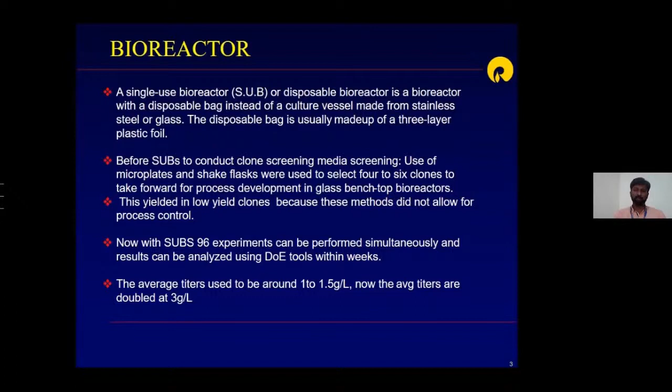Coming to types of bioreactors. As you all know, SS stirred tank bioreactors have wide application in suspension cell culture as well as adherent cell culture, with scale ranging from 20 liter to 20 KL. We can use them for suspension cell culture as well as adherent by using microcarriers. Beads can be added into the stirred tank, and we can use it for adherent cell culture processes.

Next, stirred tank single-use bioreactors. These almost mimic the SS bioreactors. These are three-layered plastic bags ranging from 50 liter to 2 KL for suspension cell culture, and they have different shapes and sizes, like cylindrical and cubical. Cylindrical usually consumes a lot of space in terms of height, whereas with cubical you can reduce the height. The H by D ratio will be 1:1 for cubical shape bioreactors.

Next is wave-induced single-use bioreactors. They are usually 2D and 3D bags. These are usually used for seed development activities and range from 1 liter to 200 liter scale.

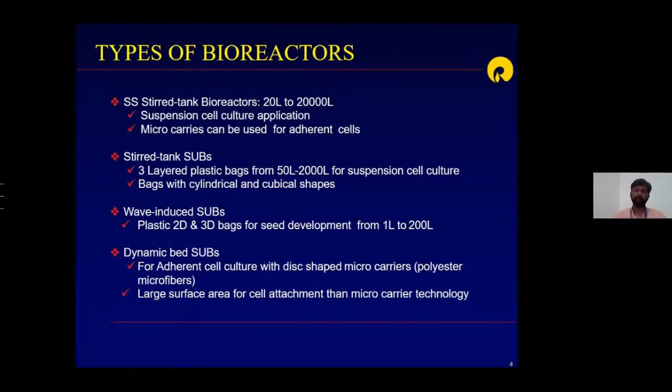Fixed bed reactors will offer much more surface area compared to microcarrier technology. Moving to the next slides. These are some of the single-use bioreactors available in the market for suspension cell culture. First, we have Pall. Allegro XRS 25 bags are available.

This is a unique technology, a biaxial agitation system, which shortens the mixing duration from 50 to 90 seconds in case of a conventional system; it will reduce it to 16 seconds, and these range from 2 liter to 25 liter scale. And again, in Pall we have Allegro STR bioreactors, which range from 50 liter to 2 KL.

In Merck, we have Mobius series bioreactors, which are usually disposable vessels starting from 3 liter to 2 KL. Again, in Eppendorf, we have BioBLU, which is 380 mL to 50 liter scale. These are also plastic vessels. In Cytiva, we have Wave 25, which is used for seed generation activity, which is up to 25 liter scale, available in the market.

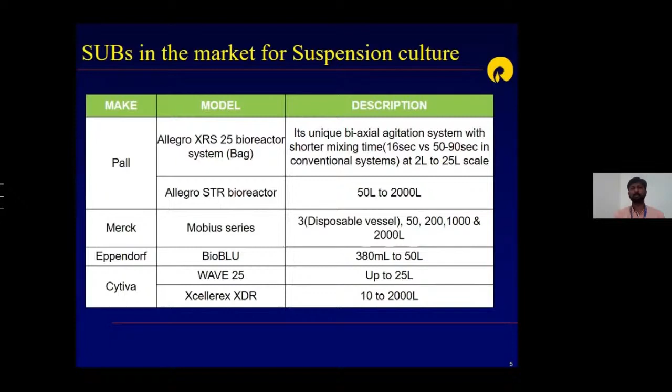Again, in Cytiva, for higher scale, we have XDR series ranging from 10 liter to 2 KL. So these are some of the suspension cell culture single-use bioreactors available in the market.

Coming to furthermore, in Sartorius, we have Ambr series single-use bioreactors. Ambr 15 and Ambr 250 series are available. These are widely used in the application of clone screening and initial media screening applications. We can run multiple batches in parallel using these Ambr series bioreactors.

Sartorius also offers Biostat bags ranging from 50 liter to 2 kL, and also Sartorius offers Biostat RM. These are the bag type wave bioreactors for seed culture application from 2 liter to 200 liter.

Again, we have a Biostat RM TX system, which is a unique fed batch and perfusion system for bags. And lastly, we have Univessel SU, which is again single-use tanks made of plastic, which range from 0.6 liter to 2 liters.

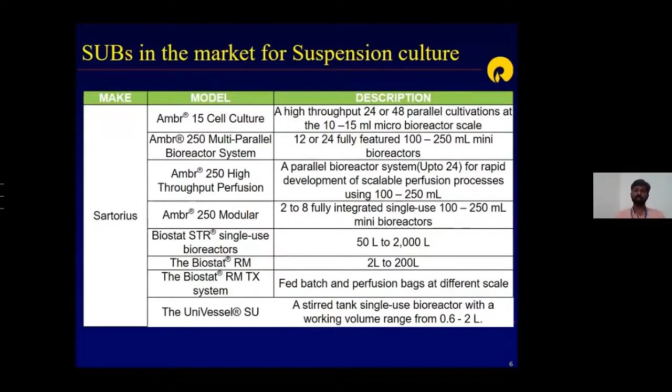In Thermo, we have HyPerforma Rocker bioreactors. Again, these are the bags for seed development activity. Up to 50 liter working volume are available in the market. In mid-range for pilot scale, we have HyPerforma single-use bioreactors from 50 to 2 kL.

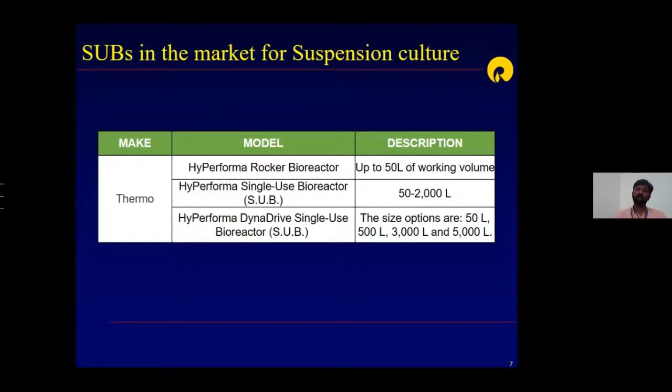Thermo also offers HyPerforma DynaDrive single-use bioreactors, which is quite different. From 50 liters to 5 kL bags are available. So next, these are some of the single-use bioreactors available for adherent cell culture process.

From Pall, iCELLis single-use fixed bed reactor nano is available, which offers up to 4 meter square area. In mid-level for pilot scale, we have iCELLis 500 plus system. This offers up to 500 meter square area. In large scale, a GMP model is also available in Pall. There is the Xpansion multi-plate bioreactor system, which offers up to 122.4 meter square area, which is a huge area.

Next segment is OmniBRx, which offers 0.5 liter to 200 liter vessels, in which we can get 1 meter square to 1,500 meter square area for adherent cell culture activity. So these are some of the bioreactors available for suspension as well as adherent. Some of the reactors I might have missed.

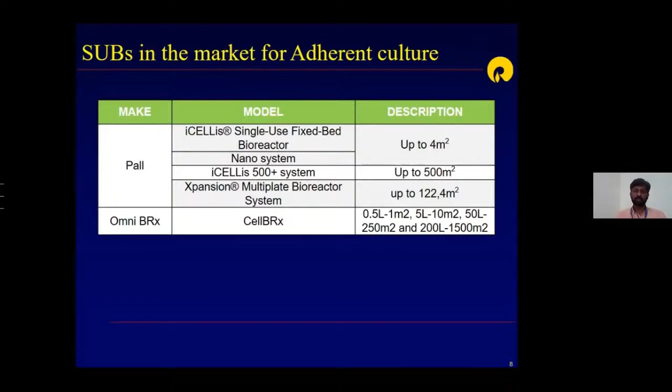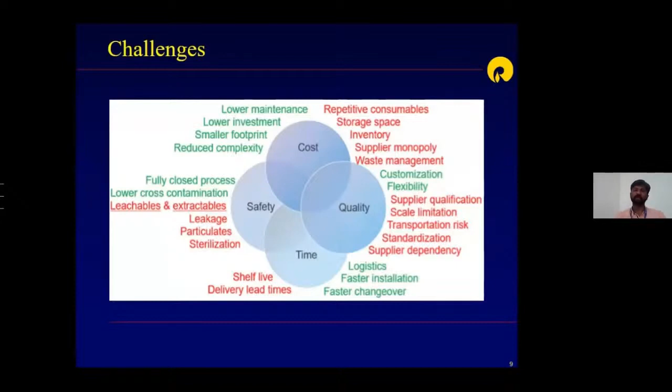Coming to challenges related to single-use bioreactors as well as conventional bioreactors, which involve cost, safety, time, quality. These aspects are the challenges which we face in single-use bioreactors as well as conventional bioreactor systems. So, advantages of single-use bioreactors over SS bioreactors.

Single-use bioreactors eliminate the cleaning validation process, as the cleaning is minimal. We can reduce activities like selection of disinfectants and CIP chemicals, preparation of protocols, approvals, execution of multiple cycles of CIP and the disinfection process. This is a huge task which consumes a lot of manpower as well as consumables as well as utilities.

We need to send the samples for CIP, and post CIP we need to send the samples and wait for the results. These can be avoided in single-use bioreactors, where there is very minimal cleaning activity required. Next one is the shortened downtime and turnaround time.

SUBs offer minimal downtime during post-harvest activities, which is usually a decontamination activity. And turnaround time is the preparation activity for the next batch, which involves CIP, pressure test, SIP, full vessel SIP, and thermocouple installation. All these activities, which require a lot of time, manpower, utilities and cost, can be minimized.

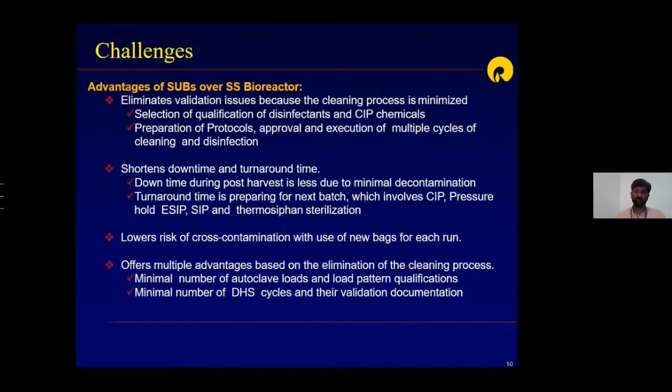Again, when it comes to capital cost and operating cost, more than 25% savings on startup capital can be achieved using single-use bioreactors. And when it comes to utility and space, the cost goes down up to 50%, and manpower cost is reduced considerably. And also the installation is very handy and very easy.

As we are eliminating the SIP and CIP process, it also eliminates the design of boilers, water purification systems, and steam lines. All these design activities can also be minimized. It also reduces the carbon footprint by 70%.

You can see the example here. Xpansion 200 bioreactor, which is hardly 80 centimeter height, which is equivalent to 20 multi-tray vessels. This is a huge amount of plastics which can be saved. That in turn reduces the carbon footprint.

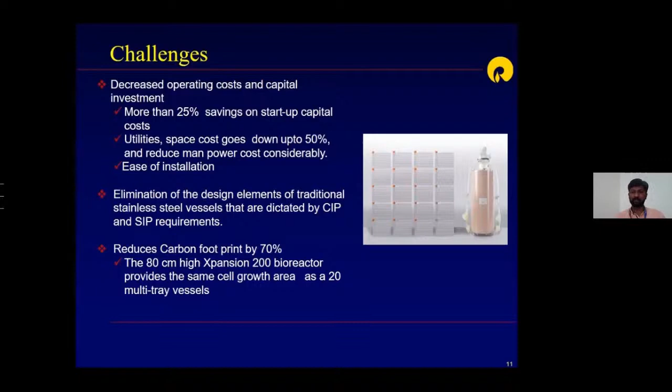Now we are coming to another segment, challenges with the single-use bioreactors. In single-use bioreactors, scalability is an issue. Mass transfer is a challenge at higher scales. This topic will be handled by Mr. Pankaj.

Then, larger scale bioreactor handling is a challenge because of the area it occupies and handling without puncture and all those things. During the installation, air needs to be passed inside the bioreactors to inflate it, and you need to check the integrity, all the ports, all these things we need to check. So this is a little hectic, and it consumes a lot of time and manpower.

Single-use bioreactors are expensive. Now, due to the pandemic situation, the supply chain is in a bad situation. The prices are almost double.

Performance is not completely proven. This doesn't mean that single-use bioreactors don't perform well. When compared to conventional SS bioreactors, single-use bioreactors are a new technology, though introduced 25 years back. So we have limited data on single-use bioreactors compared to conventional bioreactors, which have been there for decades.

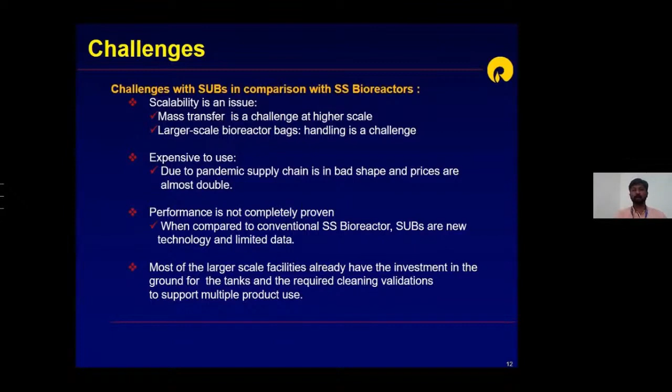One more challenge with single-use bioreactors is leachables and extractables. Manufacturers use stabilizers like tris phosphite for stabilizing the three-layered bioreactors. Under stress conditions like high temperature and irradiation, it leads to the chemical conversion of tris phosphite into bis phosphate, which is found to be detrimental for cell growth.

Again, single-use bioreactors are prone to puncture. When you go for a higher scale, 1 kL to 2 kL, as you scale it up to 5 kL, handling these bioreactors and installation without puncture is a difficult task. And these are difficult to move when they are filled with media or culture, so they need some extra tank support to move from one place to another.

Again, these are sensitive to temperature and pressure. The temperature range given for most of the bioreactors is 40 degrees Celsius. If you consider the worst case scenario, and the temperature is high during transportation and all, this leads to chemical changes and formation of bis phosphate kind of things. And disposal cost is also high in single-use bioreactors, as their size is large.

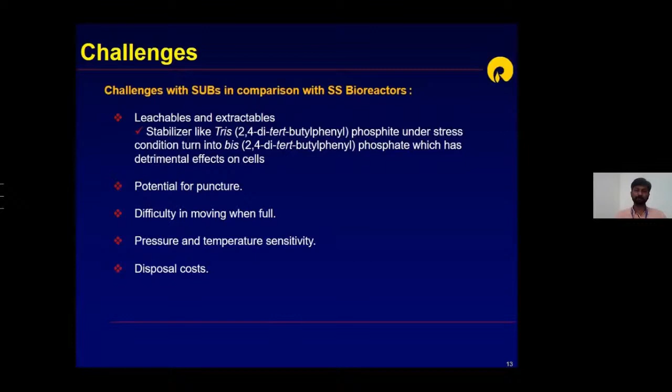The next segment is an example with time and utility. This is the mimic of a 2 kL bioreactor run at the production scale. This is the exact duration we have captured in the slide. It involves revival, pre-seed 1, pre-seed 2, seed 1, seed 2, and seed bioreactor, followed by production fermentation at 2 kL. The first 3 stages involve 48 to 72 hours, which is common in conventional as well as single-use bioreactors.

With single-use bioreactors at seed 1 and seed 2 level, we can reduce the time by almost 12 to 16 hours for each run. So every month you can run maybe 2 batches, because I'm considering here a 300 hours batch. In comparison, conventional bioreactors need almost another 2.5 days. So annually, almost 1 month will be wasted in this process.

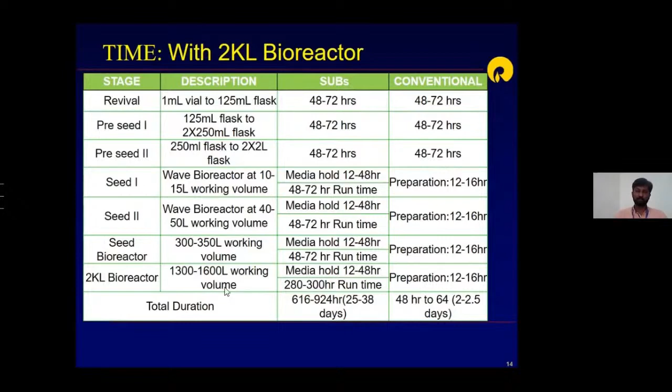The next segment is utility. As you can see, the process remains the same. For single-use bioreactors, we have some common gas requirements. In the conventional process, we require chiller, steam, chill water, PW, WFI, alkali and acid. Generators for these are also required, and the lines to carry the steam, chill water and WFI. These are all required in the conventional process, and can be minimized in single-use bioreactors.

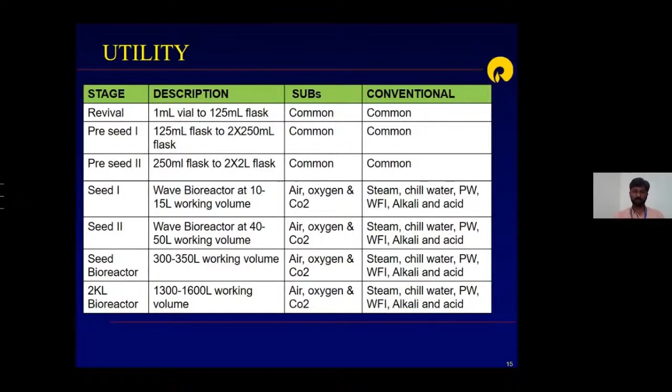A hybrid mechanism can also be adopted, wherein if you already have an SS conventional bioreactor system, you can use it for production scale, and for seed generation you can use these single-use bioreactors. Also, single-use bioreactors can be recycled, and they will reduce the carbon footprint by 70%. So that's it.

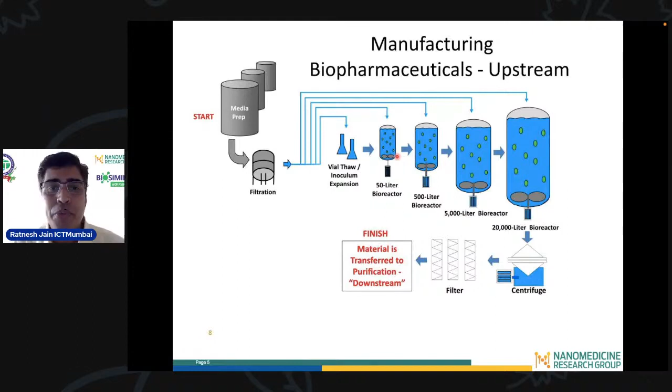Digital twins may be an alien name to some of you, but this has been operational for a very, very long time. Astronauts and those working in the airline industry use simulators before they learn how to become a pilot or an astronaut. You have to go into a simulator. So this is a very simple concept which has been in the industry for a very long time. However, these concepts are very new to bioprocesses. Again, the primary limitation is complexity.

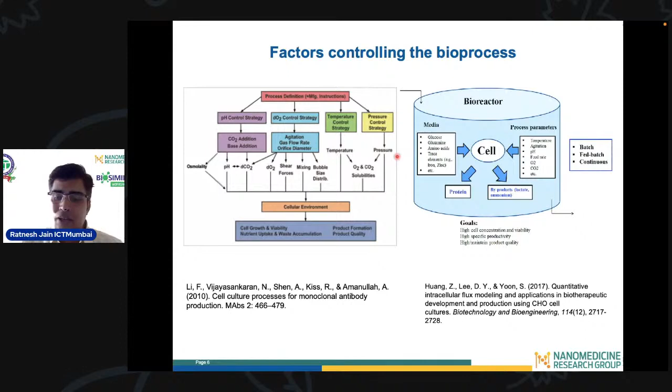And the bioreactor is also going to run in batch, fed batch, and continuous operation. It means there are so many parameters which need to be understood while running a bioreactor, and that becomes one of the major challenges for developing computational models. So digital twins come with a lot of hope to make these systems.

As I told you previously, these are virtual constructs of a physical system that mirror the behavior and dynamics of the physical system. A complete digital twin must have a physical component. It means you need an actual bioreactor and a virtual bioreactor, with automated data communication. A virtual bioreactor you can simply create in a computer, correlated with your running bioreactor, and you can get the data transfer.

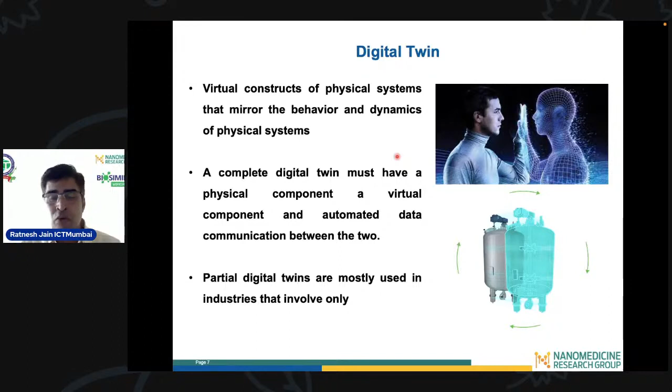Partial digital twins are also being used, where you collect the data, feed the data into a computer and try to create one. This has been happening for multiple years, but a real-time digital twin is still not a reality, which is a good motivation for companies developing bioreactors to go forward in this direction. Now, what are the existing computational approaches to give you a closeness?

DOE. Whenever I told you about multiple data like critical quality attributes, key process parameters, whether KPP, CPP, or CQA, biopharmaceutical professionals understand these terminologies very well. Design of experiment and multivariate data analysis, or MVDA, are hands-on approaches. To minimize error and have the right scale-up options, people have been utilizing design of experiment and multivariate data analysis for a while. DOE is a historically, empirically established strategy. But mechanistic approaches, which are more computational in nature, and hybrid models, both mechanistic and computational, are also in use right now in industry.

CFD, or computational fluid dynamics, is used whenever a flow pattern has to be decided, whenever you are developing a reactor and assuming mixing dynamics, how a fluid is mixed along with its components, and maybe if you are designing how cell culture behaves in a shear environment together with the bioreactor, impeller and other bioreactor mechanics. You are deciding these things using CFD much before you actually do an experiment.

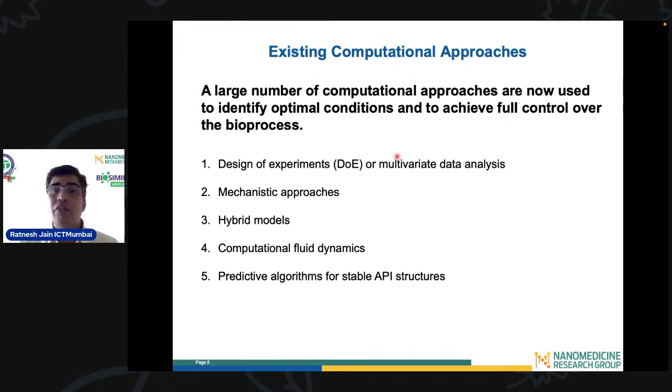You need much better control over your bioprocess before one can approach scaling from laboratory 1 liter scale to 20,000 liter scale. Maybe one can go directly to 20,000 liter scale if you have real control over the data. So digital system, as I told you, physical system, which is the primary first need. What data needs to be captured here?

So here, if you look into CPPs, KPPs, which are your process parameters, your CQAs, quality attributes of the design. Here you are running a CHO culture. Here the example I am taking is for monoclonal antibody production. You have multiple data sets, specifically temperature, DO, medium. All these parameters are controlling your quality attributes, which will define your product quality, product yield, which is also called specific productivity, aggregation of the protein, cell growth parameters.

Still, we have yet to reach real-time data calculation. So we have online analysis, inline analysis, in situ analysis, and these analyses are growing over time. So we have reached PAT and sensors where you could actually monitor DO, temperature and pH in real time. But when it comes to quality attributes, only a few quality attributes can be monitored inline.

You need to capture data. So some of the data which can be captured in a bioreactor are actually very forward in terms of developing a model or a digital twin for that bioreactor for that particular situation. So cell culture data or real-time data monitoring of bioreactors for multiple sets, which I have explained, and also the data which is continuously coming, how to process and how to manage. It is a large amount of data.

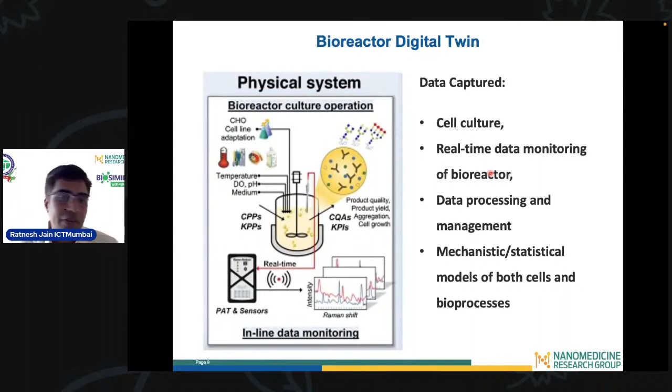So suppose you are running a parallel bioreactor, or multiple bioreactors in sequence, or different bioreactors for 13, 14 days culture, you are getting a huge amount of data. So you should have a system for how to manage it. And current digital processing has this kind of challenge. But this challenge can be overcome by mechanistic and statistical models, which are already available and already being practiced for cell culture as well as bioprocess development.

So the virtual system, which is multi-scale mechanistic or data-driven, the kinetic model. So what are you looking into? You are looking into different kinds of approaches, either cellular or reactor approaches. So there are many genome scale models already established, and there are a couple of companies developing these models. There are a lot of other PTM models, post-translational modification. You have a kinetic model, which is based entirely on bioprocessing parameters. So this is already a multi-scale mechanistic model.

These are small compartments. Since bioprocess is very complex, what people have done is compartment modeling, developed in the 1960s. Now the same compartment modeling you can apply in developing bioprocess. You also have data-driven statistical models, where multivariate data is coming into a statistical model, through machine learning or neural networks. And this is giving much more success in current model development.

So these models which are developing a digital twin are based on prior knowledge, historical data, or real-time collected data from the physical system. Now you are looking into the whole picture. How does this whole thing look? So you have a bioreactor, where your cells are growing and going into different phases. Glucose level or amino acid level also varies over time when there is growth in the cells and production phase.

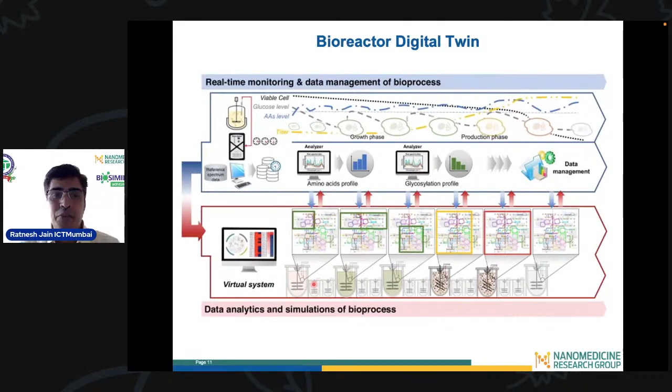We are also developing certain models in glycosylation, and specifically on charge variant analysis along with amino acids during these simulations, where we are feeding data from the real-time bioprocess to digital models, and checking whether the digital models are predicting that particular behavior, and whether follow-up processes can be developed much more effectively.

Data collection is one of the major challenges in upstream bioprocesses. So whether you have a small scale reactor, a bench or a pilot scale, you need these inline sensors. We also call a lot of them soft sensors. Raman spectroscopy has in recent times proven its worth in real-time understanding of multiple data.

So what do you get? You get reactor data like pH; you already have a lot of pH sensors. Cellular data like viable cell density, total cell density, glycan, metabolites, nutrients, amino acids. This data is continuously coming when you are doing inline monitoring. And once your data processing is there, for this particular Raman experiment, it goes again to an existing multivariate data analysis module, which gives a PLS model deployment, and ultimately you get a process value.

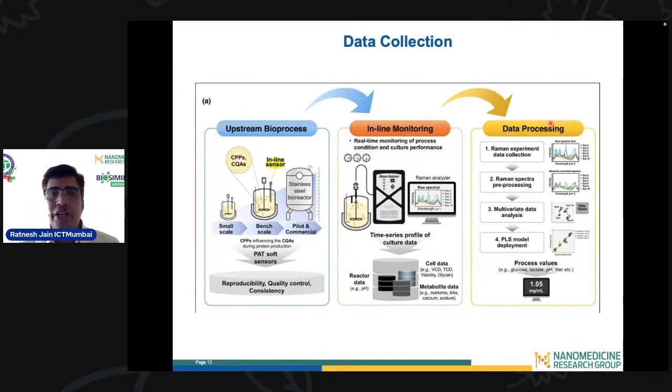So once you run multiple bioprocesses, you get a huge amount of data. As you see in other industries, big data analysis, data processing, data is oil, many other terminologies. Similarly, data is also becoming an important part of upstream. The primary challenge here is that industries who are working day in and day out on multiple bioprocesses have no control on the data which is coming out. So it is largely going to be academically driven or driven by startups or new companies who are doing data-driven models and developing their bioprocesses. But the success will come when more and more bioprocess data is uploaded on the system, so data processing can be much smoother and finer.

So I'd like to conclude here that physical and virtual bioreactors are interactively connected, and they can be connected by a management system of collected culture by inline monitoring. In addition to bioreactor development, there are enough opportunities and future scope where you could monitor the data coming out from the bioreactor. In virtual systems, multiple developments have happened on multi-scale mechanistic models or data-driven models. Data-driven is the future because of its easy compatibility with artificial intelligence and machine learning.

And they are combined with mathematically or statistically relevant input coordination. Like KPP and CPP, we all know what parameters are going to be input. We also know what we need as an output, KPI or CQA. Since we are aware of input parameters and output responses, these models can simply facilitate the conversion. Fully integrated and automated bioprocess digital twins can measure with soft sensors, and these sensors are right now working on multiple fronts.

A couple of industries are working on real-time culture profiling where they can also predict, and that is the true success of digital twins, that they can understand metabolic changes, cell growth, and also recombinant product synthesis. The future of digital twins is of course AI/ML, which is also making a lot of sense in other industries, and bioreactor companies must look into AI/ML integration in their bioreactors. Bioreactor simulators are being developed by a couple of companies, but you need a more robust, harmonized simulator, regardless of brands and complexities.

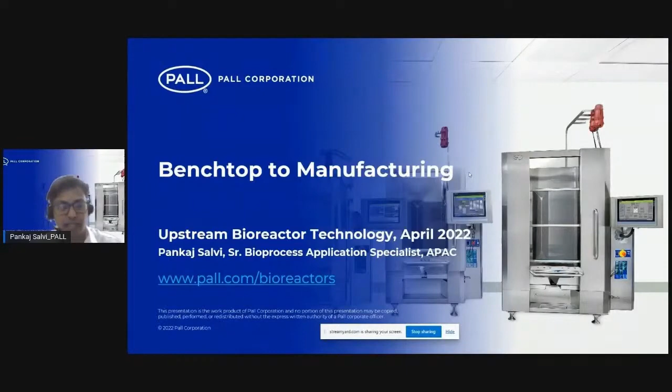Talking about the agenda, I would be touching upon the value proposition, a portfolio overview, some engineering and characterization aspects, scale up strategy, and a few case studies. So the value proposition. The Allegro STR bioreactor family is a single-use bioreactor which is compact, which is essentially useful in terms of usability. It's ergonomic so users can easily handle it. It's intuitive, which reduces the risk of any mistakes. It's a turnkey solution, a complete solution for you. And process assurance and performance would be a critical, basic requirement for a bioreactor.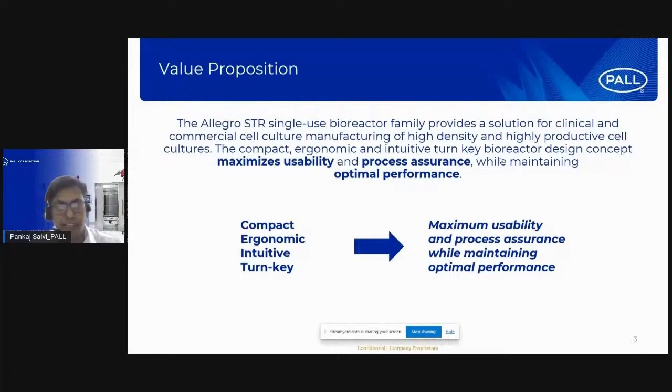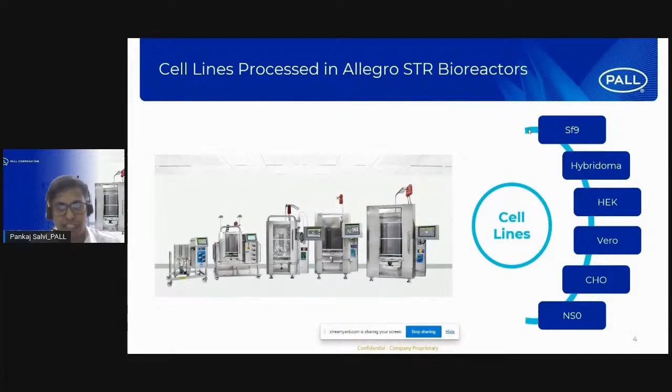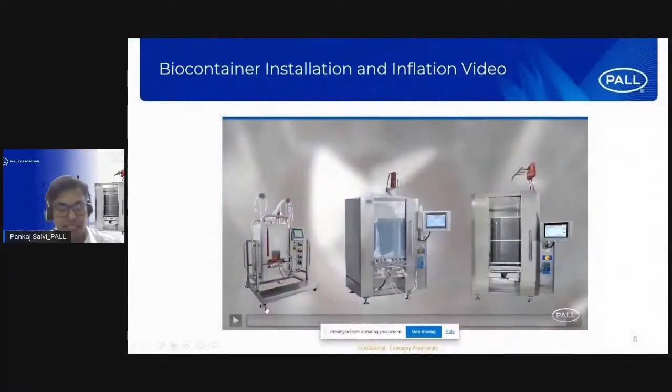Talking about cell lines which can be processed in Allegro STR, there is proof of it being used for SF9, NS0 cells, even CHO cells, and basically every mammalian cell line can be grown in the system, suspension adapted, and sometimes microcarrier-based adherent cultures. On the portfolio overview, this is based on customer feedback. I'll be starting with a video and I'll be talking through it.

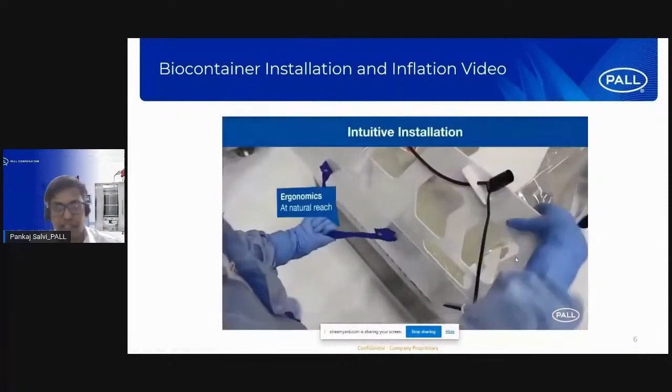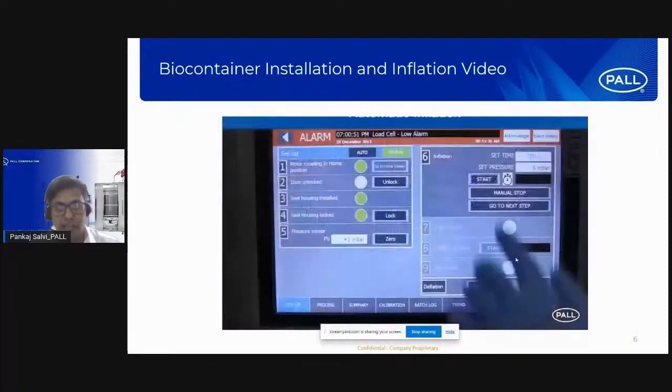So the 2000 liter bioreactor is basically a 3 meter bioreactor, so it can easily fit into any facility. You can see the packaging over here. It is very compact and it is easy for 2 personnel to install it. There are interlocks which would guide you, and there are color coded tubing labels. This is the intuitive screen. And it is an automated inflation, so there is no operator intervention during inflation. And then there is automated deflation, which would reduce your disposal volume.

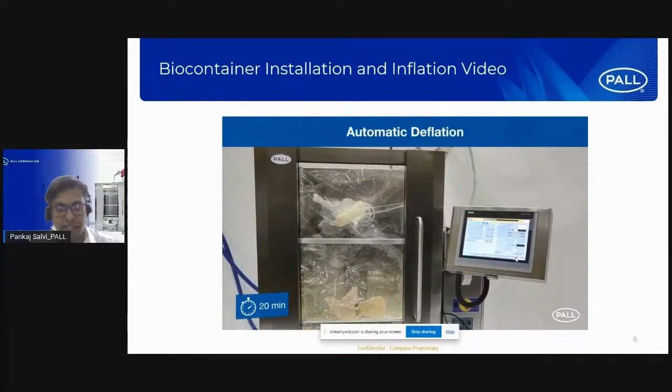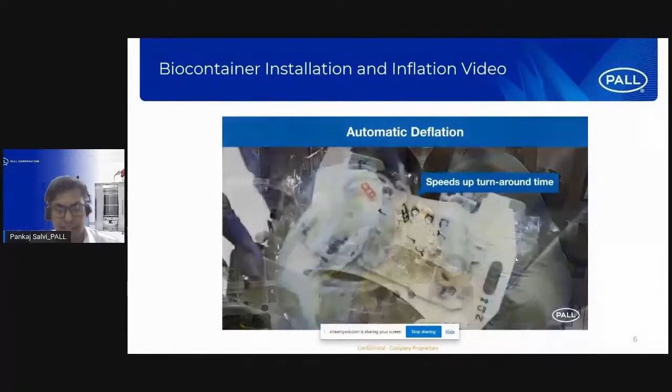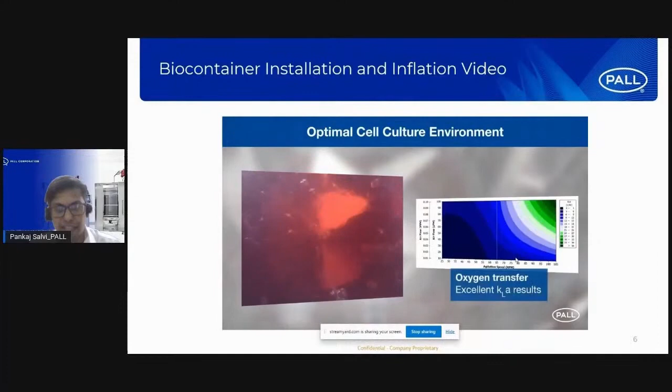And when you're going to pick it up, just 2 personnel are required because of the excellent packaging. Talking about the performance, there is excellent kLa, greater than 30. And then cell growth and viability, which I would be touching upon in my case studies.

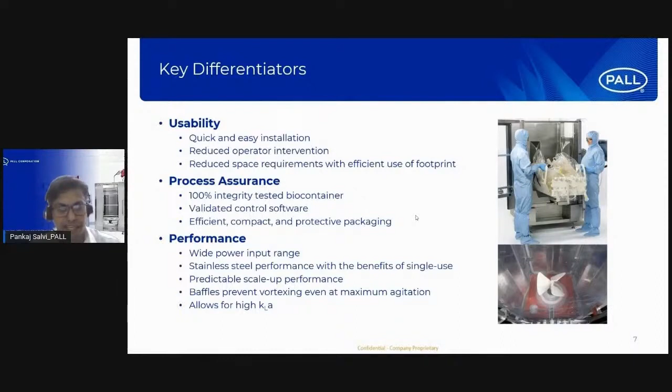So talking about the key differentiators, how does the Pall bioreactor stand? Usability-wise, the installation is pretty easy. Only 2 operators are required for the installation and complete operations, and there's a reduced footprint. Process assurance-wise, the biocontainer is 100% integrity tested and validated. That gives you assurance against failures of the SUS. Again, validated software is in there. And talking about performance, we have a large pitched blade impeller, which delivers a high power input, and that will help you get a good kLa. That I would be touching upon in the case studies.

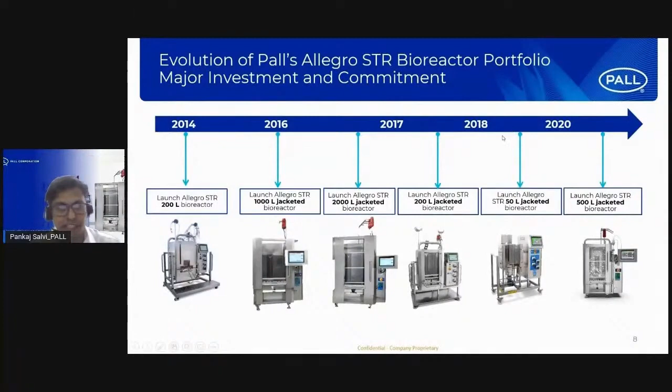Talking about the portfolio, Pall has invested a lot in the Allegro STRs. You can see in 2014, Pall started with a 200 liter bioreactor, and now by 2020, we have the complete range from 50 to 2000 liters. And talking about the engineering and characterization performance aspects.

So this is the feedback from the customers, the voice of the customer, and this is not what Pall says. So in terms of ergonomics, it is very compactly packed, which helps you in handling. So handling is very easy, and two personnel can handle it. Installation wise, the open face structure of the bioreactor being a cubicle helps you to install it easily. You can just front load the bio container. Installation wise, it will just take 10 minutes to install it.

And then talking about automated inflation, it takes like 30 minutes against a cylindrical bioreactor, which can take about 90 minutes for a 2000 liters. The tubings are color coded and numerical. So the coding helps you to install it. It is very intuitive. Talking about the footprint, the 2000 liter bioreactor is just like 3 meters, because of which you don't need a ladder, only a step stool can work.

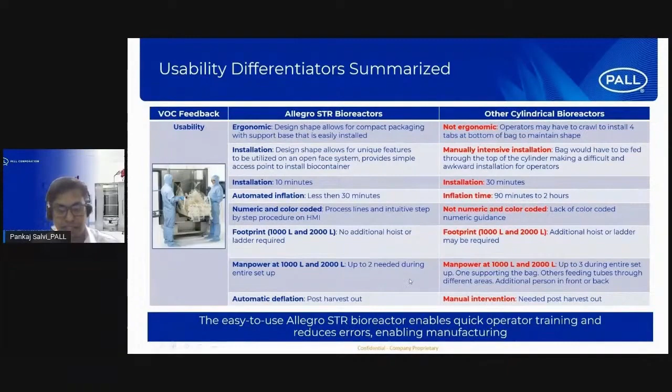Talking about manpower, two personnel can handle the entire setup. And automated deflation, which reduces your disposal volume. So that basically gives you an assurance that there would be reduced errors in the manufacturing. Talking about process assurance differentiators. So the differentiation factor is the packaging. The packaging is very compact and neatly planned, which makes it much easier to handle, and then it reduces the chances of any damage to the SUS.

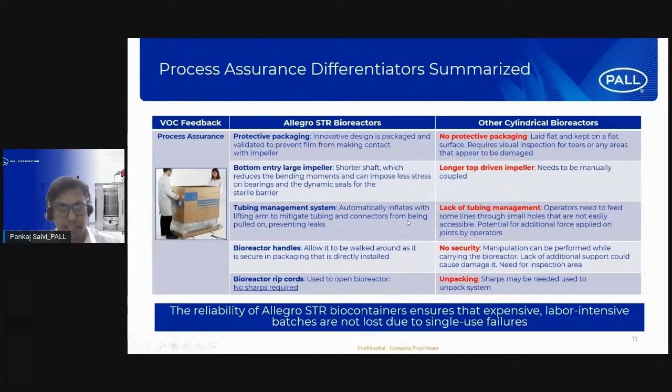There's a bottom entry impeller which has a short shaft, which essentially would reduce the stress on the bearings, and that would reduce your chances of any leakages. The tubing management is smartly done, so during inflation, without any operator intervention, the tubing would align properly. Handles, there are bioreactor handles for loading the bio container, and then there are rip cords which avoid any sharp edges.

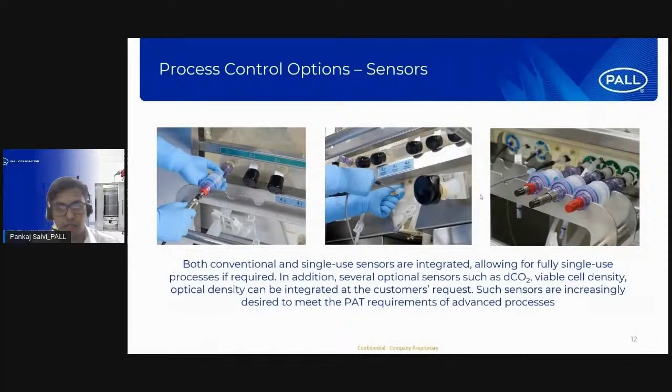Talking about the sensors, the process control. So there are single use as well as conventional sensor options for the pH and DO. And then again, based on the process requirement, the DCO2 sensors or any other PAT tool can be incorporated into the sensor system.

Talking about engineering performance and mixing efficiency. So when it was in the R&D development, based on the CFD model, a pitch blade impeller was possible because of a direct drive impeller. And this essentially has given Pall the flexibility of having a big impeller that is half the diameter of the bioreactor, which helps to drive better power input. And with this, you can actually get a kLa more than 30 per hour, which essentially gives you the confidence that you can work in a big process range for the power input and get your process scaled up, and essentially a good kLa.

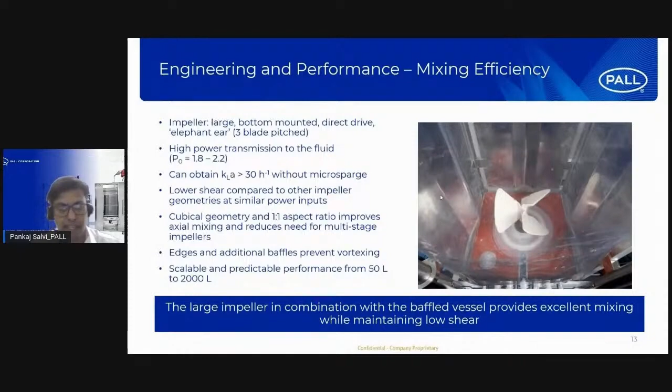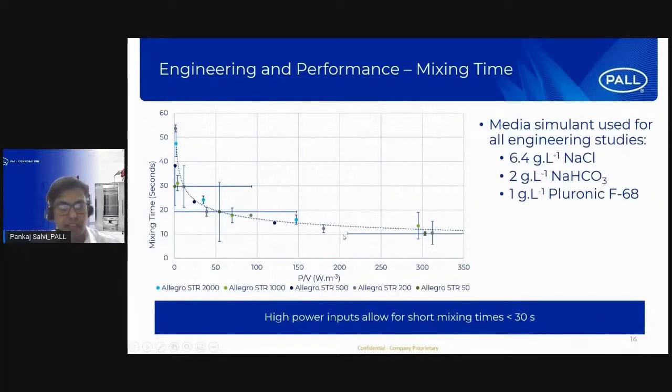Talking about the engineering performance in terms of mixing time, which becomes very critical in a bioreactor. So this study was done with a media simulant. The media simulant was used, and the mixing time was evaluated with the addition of an alkali based on the pH to achieve 95% of your stable set point. So essentially you can see over here that the graph shows that each of the systems is scalable and similar in performance. And then with high power input, you can even achieve a mixing time of less than 30 seconds and even less than 15 seconds.

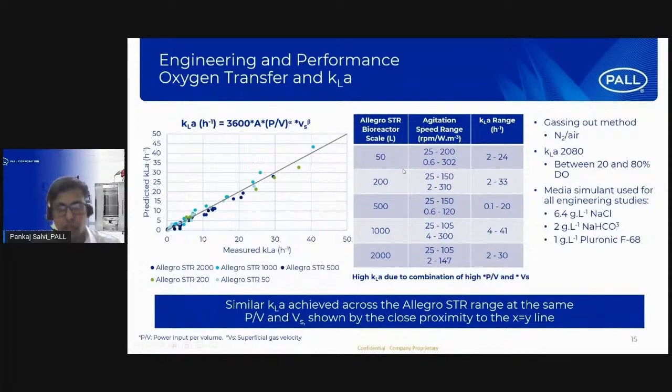And talking about CO2 evacuation, essentially when someone is scaling up to a 1000 liter scale or a 2000 liter scale, one critical factor that comes into picture is the CO2 accumulation in the system, in the media. So the dissolved CO2, if it increases, is going to be toxic to the cells. And considering this, the essential thing that we need to check is the stripping out of the CO2.

So for this study, you can see with the Pall Allegro STR, which has a macro sparger, even with higher sparging of air, this essentially helps you to achieve good CO2 stripping, in the range of more than 1 mole per liter per day. This was evaluated against an in-house perfusion process where you get 146 million cells, and against a fed batch process with 23 million cells.

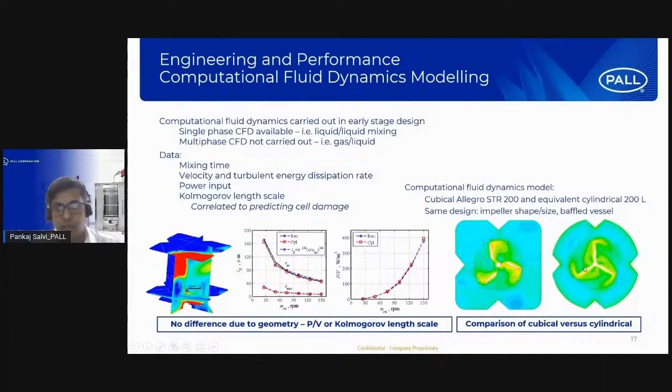And talking about computational fluid dynamic modeling, this study was done for a comparison between the cubical bioreactor and the cylindrical bioreactor. With this graph, you can see the Kolmogorov length between the two bioreactors is similar, and the power input per volume is similar between the two bioreactors, and this image shows that there is essentially no difference between a cubical Allegro STR and a standard cylindrical bioreactor.

And how can we help you with the scale up? From literature you can understand that scale up is a function of your mixing and the mass transfer. If you can achieve these two factors, you can scale a process well, these being the nonlinear scale up parameters. It has been seen that if you can match the power input per volume and the superficial gas velocity, you can have good mixing and mass transfer, irrespective of bioreactor size. It can be a benchtop bioreactor or a 2000 liter bioreactor.

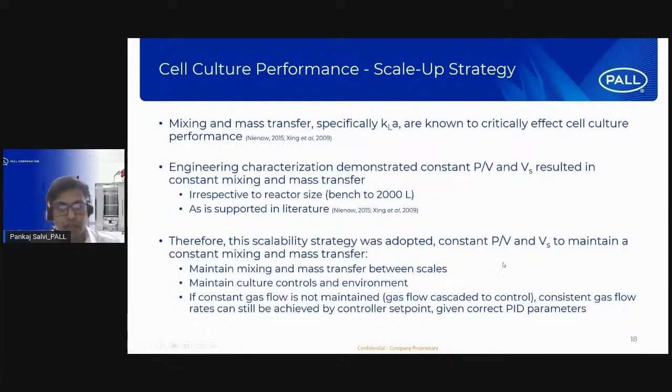So essentially what Pall does is, with the extensive study available, we can help you with achieving a constant P/V and superficial gas velocity. And with a good PID control, you can have good environmental control and gassing in the system.

So this is an example of how we usually go about scale up. Here you can see the scale up was done from a 1.4 liter traditional bioreactor to a 200 liter Allegro STR. You can see the power input of 70 was achieved. If you keep a constant P/V, you can achieve the same in the Allegro STR. Whereas if you consider tip speed, you would have a lower kLa. Here you can see it's just 2 against 9.

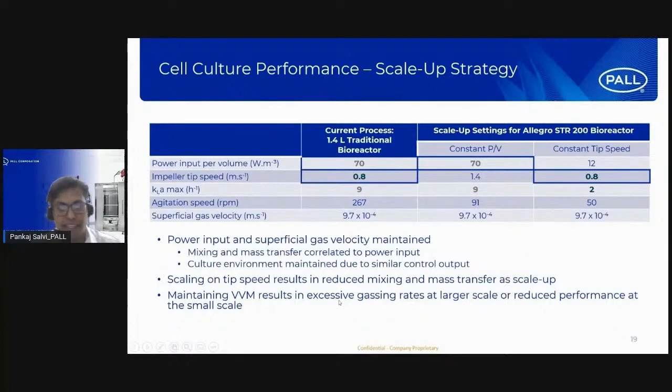Having a constant power input and superficial gas velocity would help you to scale the process in the right way. And if you consider VVM as a scale up parameter, then you would be adding excess gas into the system, which is not required, and that would reduce your performance.

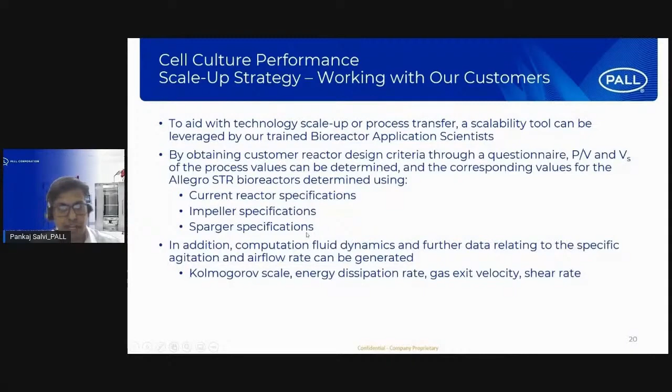Talking about scale up strategy, how we can help you with that: trained bioreactor application scientists can assist you with the scale up. For that, we would require some inputs from your end. That is the current reactor specifications, the impeller specification and sparger specifications, which can be obtained from the bench scale bioreactor vendor or from data sheets. Then based on that, we can help you achieve that scale up.

Now I'll be touching upon a case study. This case study is on AAV production in a stably transfected cell line, and this is public literature, from CEVEC. Here, an immortalized human amniocyte cell line was selected, and it was a stably transfected cell line producing AAVs. The process Pall got was in a 10 liter stirred tank benchtop bioreactor, and the criteria was to scale it up to 50 liters and 200 liters.

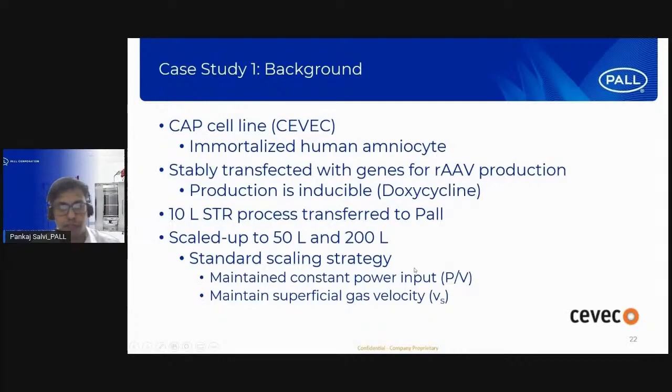The strategy employed here was getting a fixed power input per volume and maintaining the superficial gas velocity. This is the scale up tool that we employ, in which we need some inputs from the customer: the geometry of the system, inputs on the agitator, the power number and whether it is operated in upflow or downflow. And how is the sparger? Is it a micro sparger? Is it a macro sparger? Even if the benchtop bioreactor has a micro sparger, we can scale it up in an Allegro STR with a macro sparger.

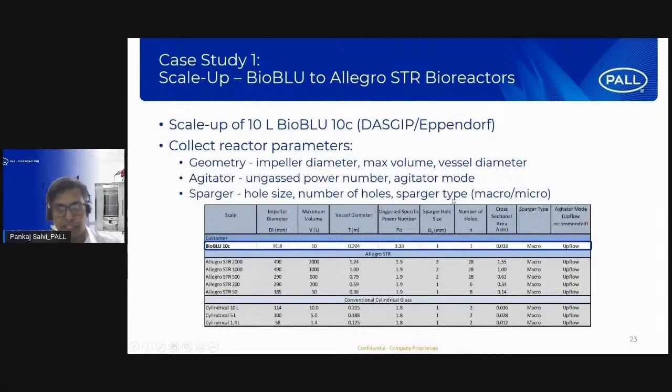And with these inputs, and additional inputs on the present process like the agitation speed and the sparger flow, we can achieve that constant power input here, as you can see, and the superficial gas velocity, which would reflect in your kLa.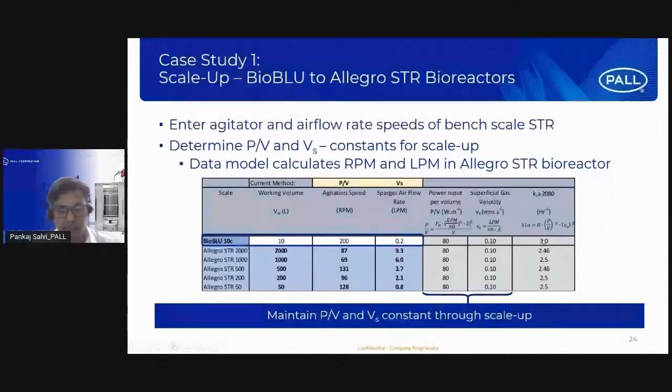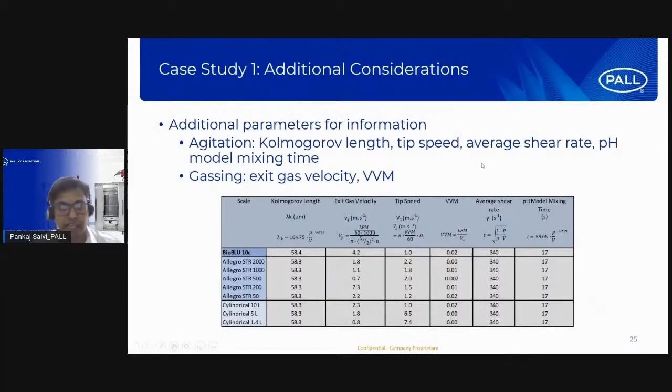And like the scale-up study further on, if you have those inputs, we can even evaluate further parameters like Kolmogorov length, the tip speed, the average shear rate, and then mixing time. This would be critical if the customer is very cautious about very sensitive cell lines, where the shear can be pretty high. Shear can create damage to the cell.

Talking about the performance, this is the study where the purple line indicates the BioBLU bioreactor at 10 liter scale, and the other lines indicate the Allegro STR50 and the Allegro STR200. Over here you can see you get comparative growth achieved in this bioreactor and viability, and I would say better viability and growth. And in terms of titers, we've got comparable titers in both systems, in the benchtop bioreactor as well as the scaled-up bioreactor in the Allegro STR.

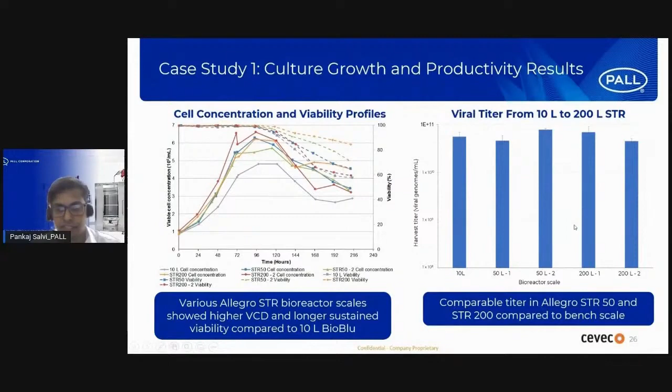Another case study touches upon a comparison between the traditional cylindrical bioreactor and the cubical bioreactor Allegro STR. Here, maintaining the same power input, we can achieve a scale-up, or essentially the same conditions, between a cylindrical bioreactor and an Allegro STR cubical bioreactor. In this case all the linear parameters were maintained the same, and the power input was maintained the same, with differences in the agitation. This was a CHO-S cell line in which the product was IgG1, and we have this as published literature which can be made available to the customer.

Talking about the performance, similar or even better performance was obtained in the Allegro STR against a cylindrical 200 liter bioreactor. Over here, this indicates the Allegro STR, whereas this indicates the cylindrical bioreactor. And again, in terms of titers, better or comparative titers were achieved in the Allegro STR against a cylindrical bioreactor.

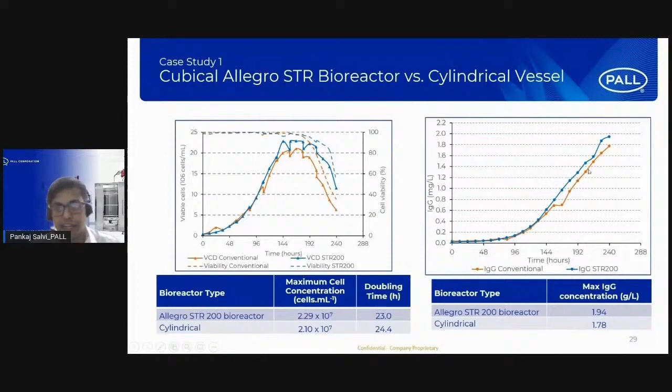Talking about the support services we can provide, we have application scientists to train the customer and support you with consultation and process support, with troubleshooting as well. Trained service personnel are available whenever required. Validation services are available for single use, covering extractables and leachables and other aspects of single use. And process development services are also available from Pall. Being a global service network, we can assure you the most efficient support.

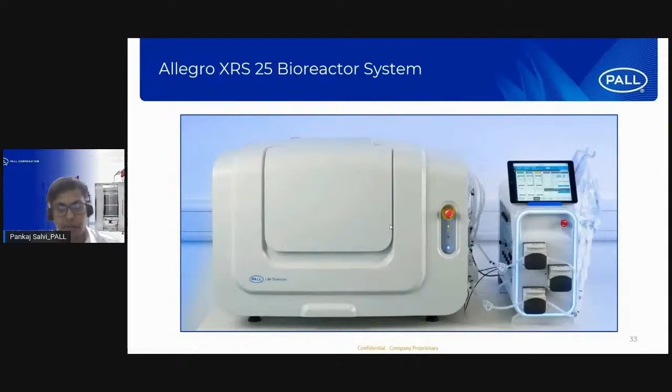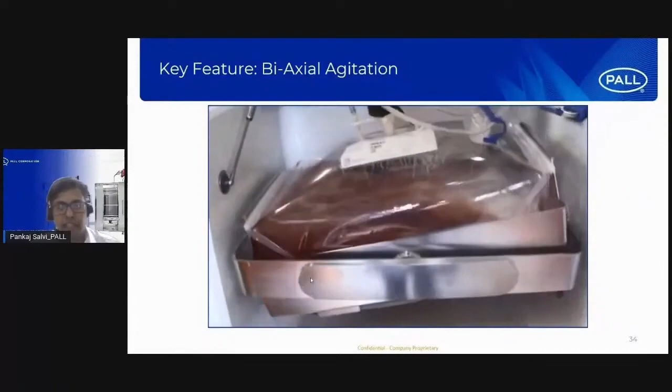Talking about the seed train, we have the XRS bioreactor, a rocking motion bioreactor which can support your seed train requirements. I'll just run you through the video. This is a biaxial rocking motion. Instead of a single axis, it is biaxial mixing, which gives you better mass transfer and better mixing in the system. So you can obtain a better kLa than a traditional single axis rocking motion bioreactor.

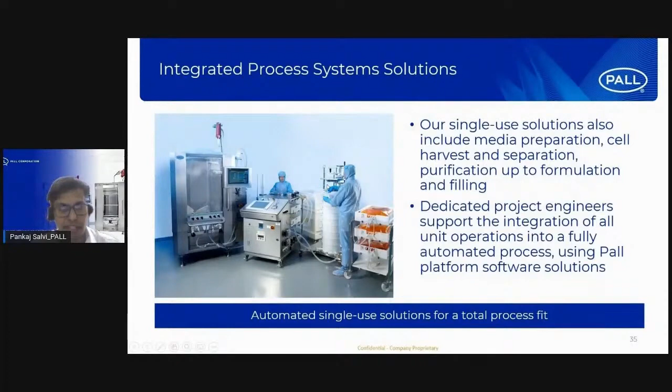And support-wise, Pall can support you end to end, providing end-to-end solutions, not only the bioreactor, but your downstream solutions, right from clarification to your fill finish operations.